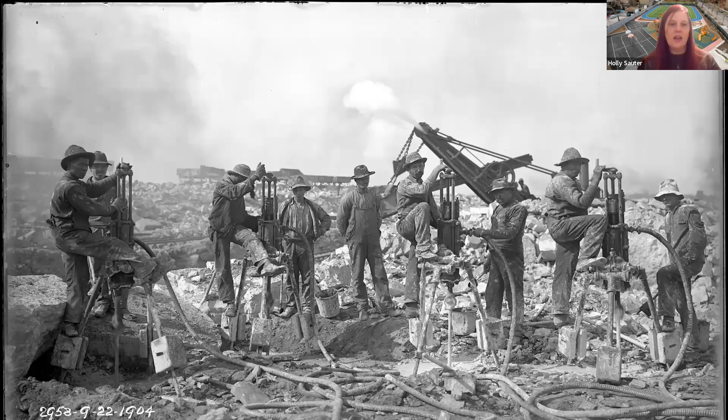Our public affairs people have some absolutely tremendous photos. Feel free to go to our website and sign up for our daily email, they always include a historical photo. Going back to that sanitary district of Chicago, it was started in 1889, and what we actually did was start working on protecting the environment through this water environment, which is 81 years before the US EPA was even created.

This is a picture of some of the work that was started back in the late 1800s, early 1900s, to address the pollution crisis stemming from the water supply in Lake Michigan.

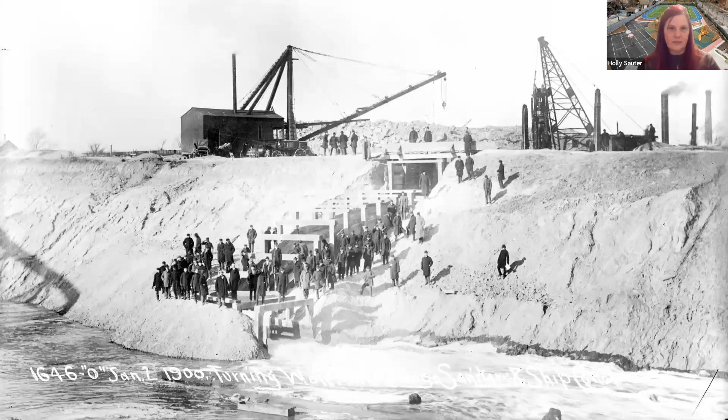Here's another fantastic photo. Our first assignment, of course, was to reverse the flow of pollution away from the lake and send it back downstream to where the dirty water is diluted and eventually makes its way to the Gulf of Mexico. This was essentially the solution to pollution as dilution.

Unfortunately, we learned not too long after that we needed to do some additional things. But we created a 61.3 mile system of canals, deepening and widening the waterways and using gravity to move that sewage and stormwater away from Lake Michigan.

The sanitary ship canal, which runs adjacent mostly to I-55, was completed in 1900. We have the North Shore Channel, which was completed in 1910, and then also the CalSag, which is along the Southwest Highway there, in 1922.

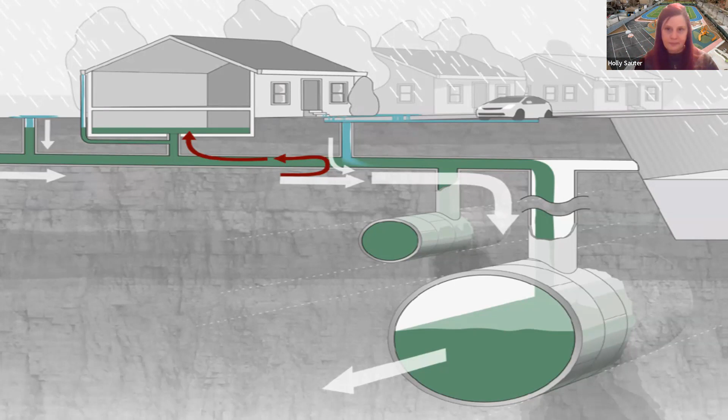TARP, the deep tunnel, captures the excess flow from local sewers as much as it can, because when those local systems are full and can't make it into an interceptor, they can go out what we call a combined sewer overflow, essentially a relief pipe out to your local waterway, allowing water to keep flowing into the river system when it can't make it to a plant. So TARP was designed to try to capture as much of those combined sewer overflows, or CSOs, as possible.

The entire project was carried forward in 2 phases. The first phase was the tunnels you see here. They are 109 miles long, completed in 2006, and currently in operation. We also have 2 major reservoirs. One is completed, in Thornton, off of I-80 - that's the very large, deep pit you can't see the bottom of as you're driving along. The other is the McCook Reservoir, also along I-55. It has 2 lobes; one is completed and online, and the other is currently under construction, estimated to be completed in 2029.

So with all of that, we go back to flooding in your home, and what can we do, and why are we looking at doing this? Understanding that your local system is a confined space, it's a bottleneck point, right? And the other super important thing to think about when you think about this being a bottleneck is, how do you alleviate the bottleneck?

So in a combined system, that's all the rainwater, all the water coming from your home, your laundry, your toilets, your dishes, everything, making it into the same pipe. But we know that stormwater that falls from the sky generally isn't as dirty as the things we use in our home or the waste we create. So in some communities that have access to a waterway, they are separating their sewers - they have a sanitary and a storm sewer, with the storm sewers going directly to the local waterway, allowing the sanitary to just collect wastewater. But Chicago, being an older community, a large portion of it is combined.

So what we look to do is take off that stormwater load as much as possible so that it's not making it into the sewer system, allowing more space for everyone to use their home and not be flooded. So having said that, we look at what can we do to prevent flooding. There are 3 types here that are probably the most common that people see with their home.

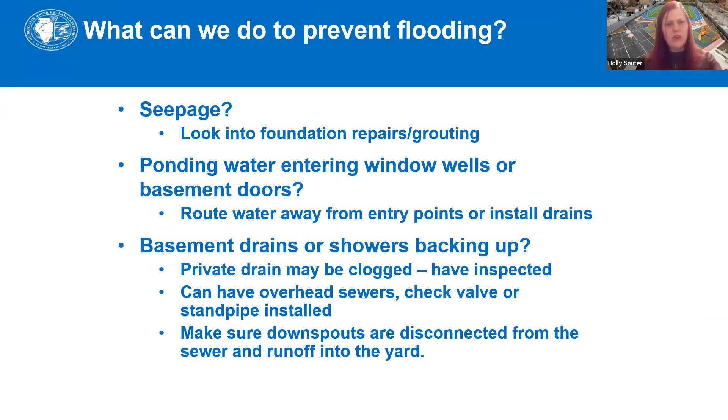So, stormwater management—there are various ways that we protect our water. One of the major ways we accomplish this, in addition to TARP, is by better handling that stormwater, trying to keep a lot of it out of the system.

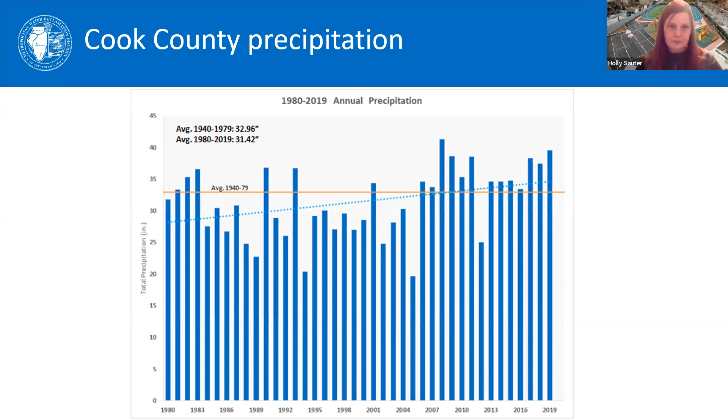In 2004, the MWRD took over authority as the Regional Stormwater Authority for Cook County. Because of that, we stepped into action and took a multifaceted approach to this issue of stormwater and flooding. We created six watershed plans. A watershed is basically the areas around a river that are tributary, or flow naturally, to that water body. We look at those watershed plans, look at what water is coming there, where the flooding is occurring, and try to create a regional mapping detail of the issues, to see if there are viable projects in those areas.

Additionally, we have stormwater partnership opportunities, which is one of our most successful programs that we do every year. We partner with the local community, ask them what problems they have, where their flooding is, what we can do to help, and if they have any ideas.

So we do everything from being a funding partner to something they've already identified and have done the engineering on, but they might not have all of the funding capacity, to the entire opposite side of the spectrum where they tell us we have this huge problem, we can't figure it out, we haven't had the funding to do the engineering and construction, can you help us? So we'll step in and do that as well.

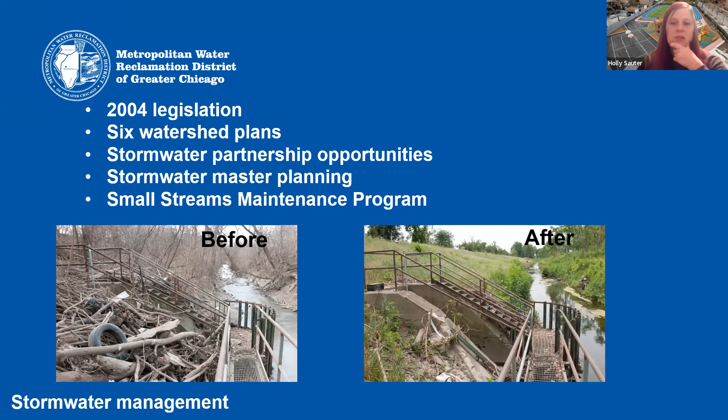We also have what's called a watershed management ordinance, which is part of review when anyone needs to do, especially commercial, but anything over I think it's anything over half an acre—if they're going to do any significant renovation, construction, demolition, etc., they have to get a permit from us. That permit will require them to retain or detain water on their property. Depending on the size, we require certain volumes to make sure they're managing their own stormwater and not affecting their neighbors.

So green infrastructure—this is my current bread and butter. TARP is, you might hear the words gray and green infrastructure. TARP, the giant tunnel program, is gray because it relies on the traditional thoughts of concrete pipes, sewer systems, water treatment. However, as we've talked about, storms are increasing, and we know we need to remove the stormwater from our combined sewer systems. So one of the ways we do that is through green infrastructure.

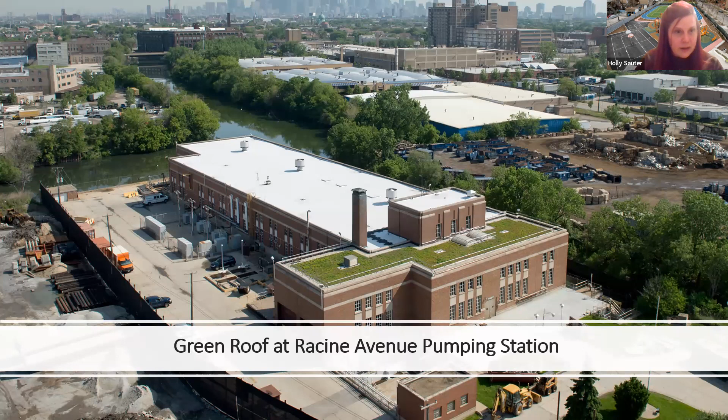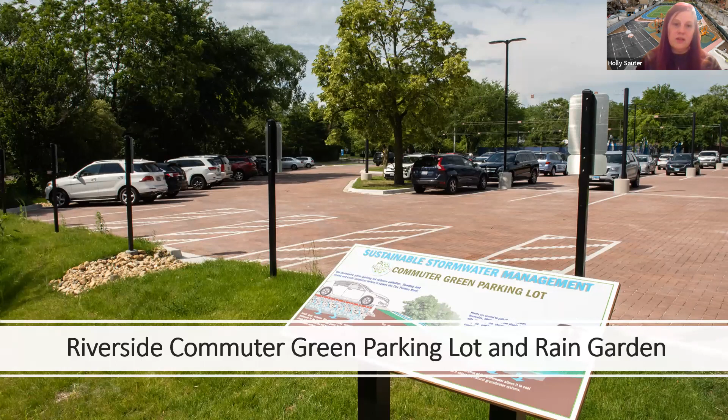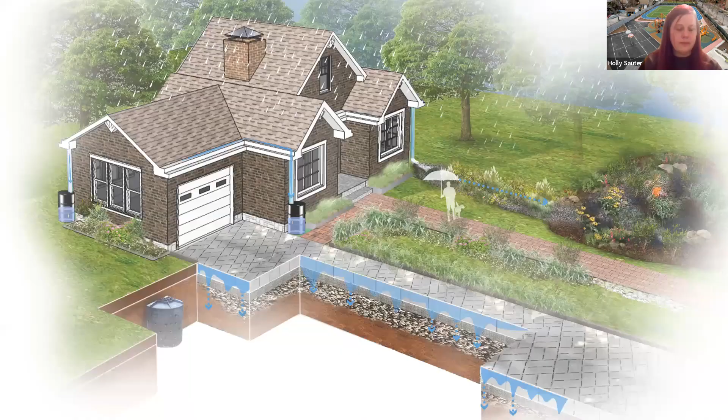So here's a graphic, and we've got quite a few things here. I'll try to run through them pretty quickly.

Steps that you can do before a rainstorm: pay attention to the forecast, obviously, and make sure that your gutters and your drains are clear, because that will obviously impact your home.

If you do have basement flooding, you should also consider talking to a sewer plumber to see what your options are for your home. Another smart thing is your system, or what we call laterals, that come out of your home to the local sewer line, can get clogged with plant roots, tree roots. A lot of living debris can break through those systems and create clogs and blockages. So if you're looking to re-landscape your property, move things, or plant a tree, it's really a good idea to be cognizant of where your sewer line is, to make sure that landscaping is not going to create those intrusions into your sewer.

If you have a sump pump, you should check it regularly and make sure that it's working. And then, of course, we're going to talk about disconnecting those downspouts, making sure the water is not making it into the system, that it has a chance to feed your grass and move across your ground properly.

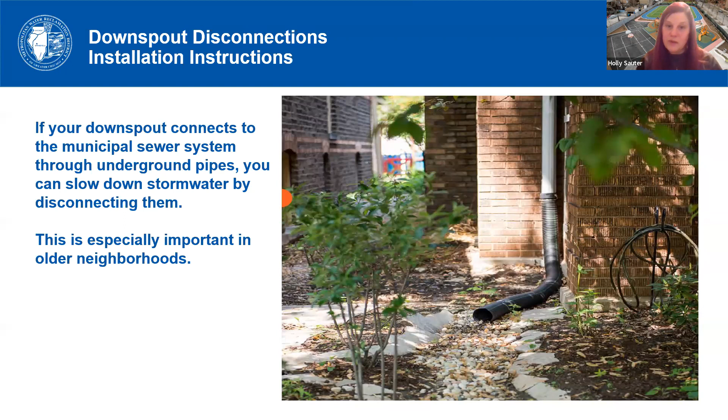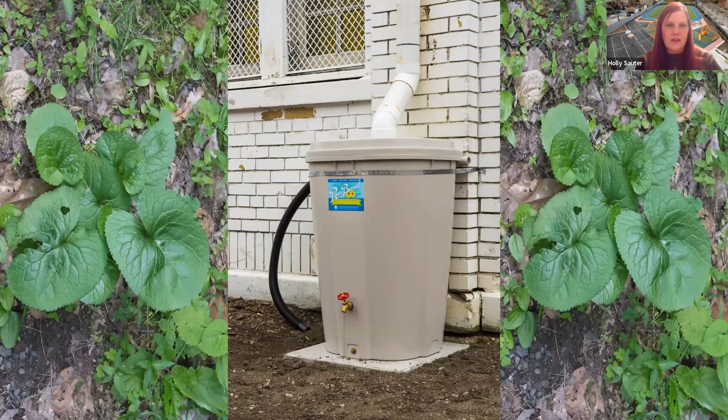Rain barrels are pretty popular. Here's a nice one that we have. You can also use these to water plants. It's not potable water, you shouldn't drink it, but it's great for plants because it's not treated with the chemicals and other things we use for our drinking water. They are watertight and usually have a spigot on the end. It's good to elevate them so you can use them for gravity feeding your plants, if that's what you choose to do.

They're usually placed directly beneath the downspout, and the downspout just comes right into it. You can actually connect these in tandem. If you've got a lot of water from one downspout and it's overflowing, you can put a couple of them together.

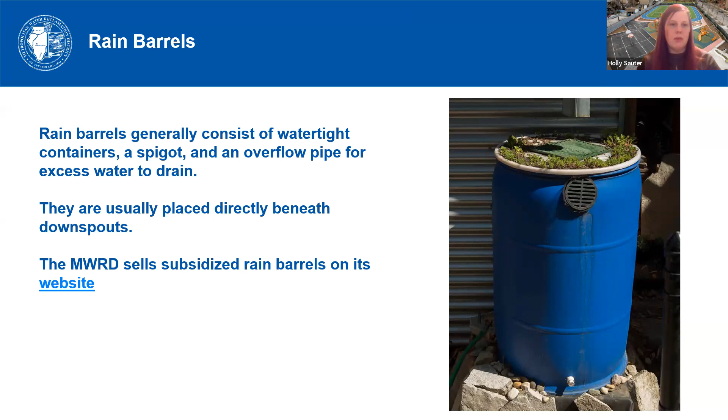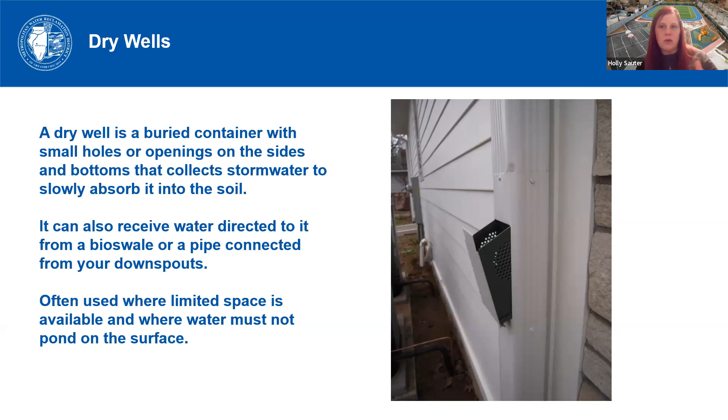Dry wells are much less common, but they're worth a note. They are a professional install, typically a buried container with small holes on the sides that collect storm water and let it reabsorb back into the earth. They're good for where space is limited and you don't want water ponding on the surface. But they also have to be a certain specific distance away from a structure that has a basement or a subgrade level, to protect those buildings.

Rain gardens and bioswales, we've talked a little bit about these. They are depressed areas with plantings that also have some special engineered soil underneath the bottom that allows for the water to infiltrate. They're supposed to drain within 24 hours - that's how they're designed - and we prefer to use native vegetation.

The reason for that is native vegetation in our area tends to have very deep roots, and very deep roots just means they drink a bunch more water, which is great. They're also really important and beneficial for pollinators and insects in the area. And they have very pretty flowers - there are species out there, I promise, that have nice flowers.

But when you are getting ready to do a rain garden, there are certain things that are important. If you have taller plants you'd like to use, you should put them in the center. Large perennials 2 to 3 feet apart, and shrubs need at least half of their mature diameter apart.

So it's going to look kind of sparse when you first plant this, but within a year or two it's really going to fill out. That first couple years, you just have to be super diligent about weeding. Once those plants start to fill in, they take over, and weeding isn't nearly as much of an issue when these are successfully rooted properly.

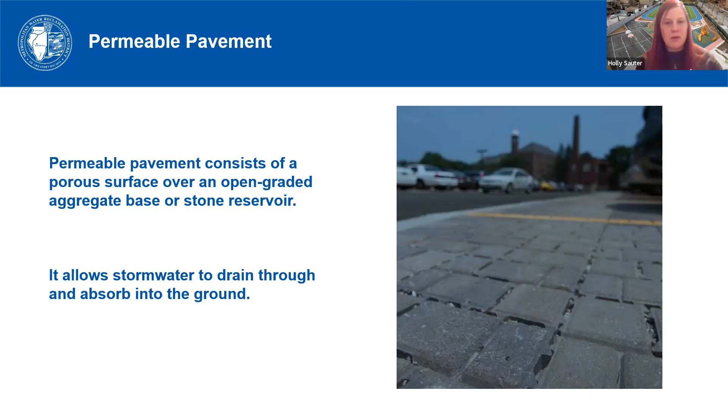They're not all permeable. The trick to look at is when you see this gap and can see that tiny chip in there - not 100% guaranteed, but odds are that's more of a permeable space. If you go look at your patio, for example, odds are the bricks are flush together for the most part, so those are not permeable surfaces.

Besides that, it looks like I am ending right about on time.

Water is a huge resource, and it can also be a huge heartache for us all. I completely understand, I've had basement backup myself, and it's horrible to deal with. So I'm here to answer any questions. We have over 5 million residents that we serve, and we're really trying to get the message out to help in any way possible for everyone to understand what your sewer does and what you can do to help your own property. So, Carla?

Yeah, thank you, you really are right on time. Nicely done, there's so many things to cover. I just think it's so great to actually understand why things are flooding and the infrastructure of everything, I think, is so critical. And also how things like just cleaning your gutters and messing with your downspouts can make such a huge difference. But we've got a good number of questions here. We're going to get through as many as we can by 7.